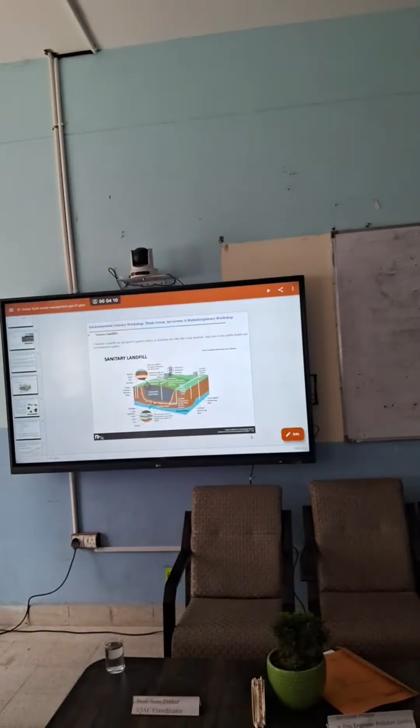And poorly designed, poorly managed landfills can also create some environmental consequences. So let me show how. This is the picture of a typical landfill site. In the figure you can see that a landfill is nothing but a pit. In the pit you can decompose your waste.

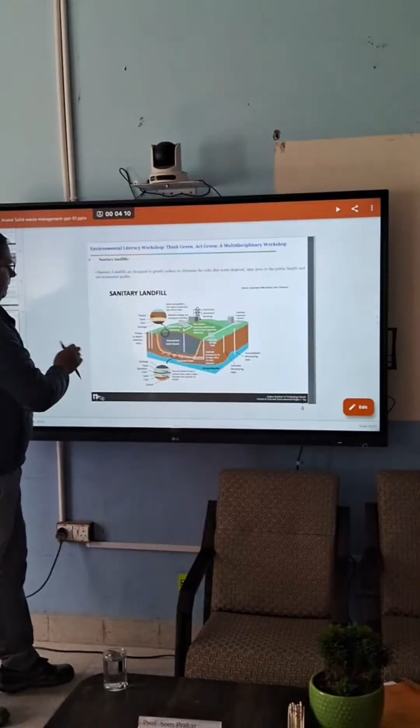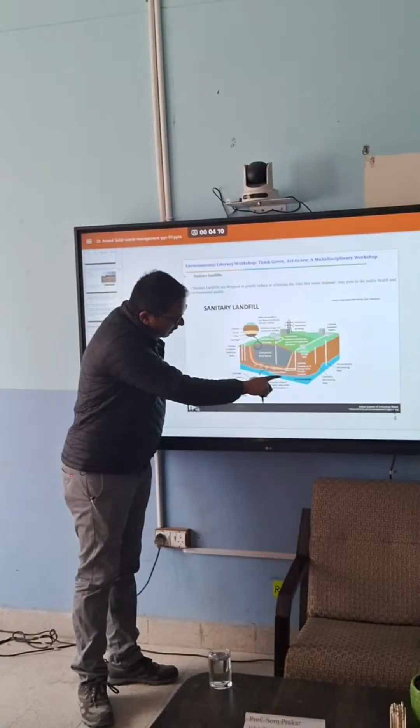Suppose this is any area, you can create a pit for the landfill. In this pit, you can keep your garbage, your waste material, compressed. After compression, at the bottom layer of the pit you can use a polyethylene layer. For what? Because of the leachate.

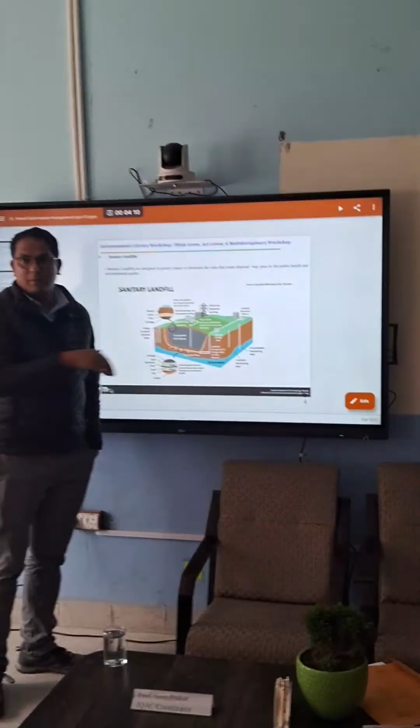If you keep your garbage in the pit, sometimes after degradation, after disposing of your garbage, some liquid